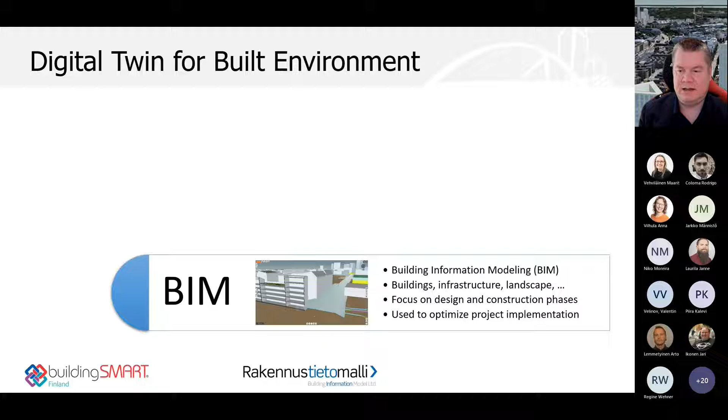There are also different levels where we can see the digital twin for the built environment. If we think about building information modeling, that is mostly at project level. So you have BIM models of the building, BIM models of the street, pipe networks, or anything that you are going to construct in a project. The focus is mostly in the design and construction phase, and the goal is to optimize that phase.

We have a city level where we are talking about city information modeling, where we have an information model of the existing city and also city planning and city development on top of that. So the focus is on future city development. And on top of that, we have asset information modeling level, where we have a database of all the assets, all the elements in the real world, and that can be used for optimizing the daily operation of the city, like how traffic is moving, how energy is used, how the environment is developing, and so on. So all of these levels combined make up the digital twin.

Here are some examples of digital twins. Digital twin of existing conditions is one part that you typically start from in the project. You have different kinds of city models. On the left, you can see the city model of Tampere, which is a photogrammetry model produced with aerial photography or drone photogrammetry. These kinds of models you can create with drones, for example.

On the right is an example of a city information model based on the CityGML standard, which has objects with attributes, and the model has a hierarchy. So that's a more intelligent model of the city. But you can import different kinds of survey data. Maybe the city model is updated once a year, but for the project you can use laser scanning and different survey methods to make much more accurate models of the existing situation.

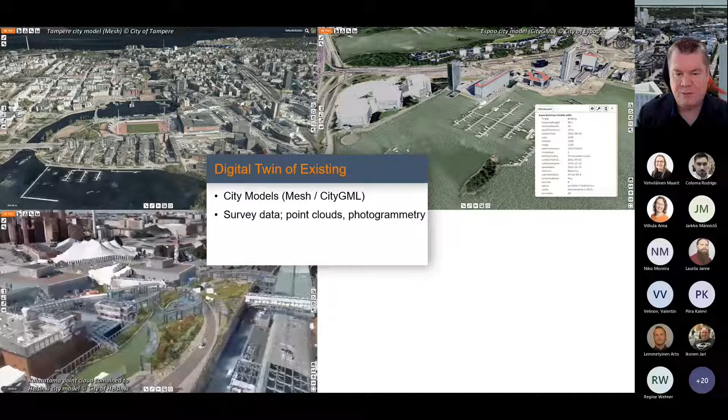For example, this point cloud has around 300 million points, and the point density is a couple of centimeters. So very, very accurate models. As you can see, all the vegetation and leaves and everything is modeled very accurately.

On top of that, we can add different kinds of GIS data. GIS data is geographical information that has geometry, attributes, and geolocation. So all of this data has geolocation, meaning any element here knows its location in the real world. So we can have different kinds of data like map data, area planning data, and traffic network data that can be combined with the city model.

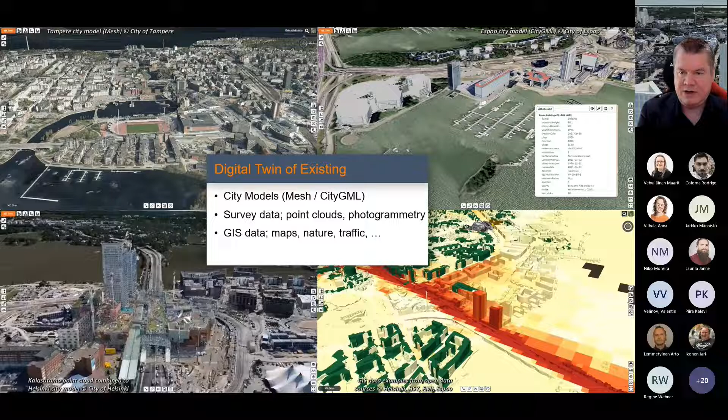There is a city model of Helsinki and Espoo combined together into this kind of regional model. We can have traffic pollution information; this is air quality information. All of this information comes from different sources. The air pollution data comes from the regional actor in the Helsinki region, and this comes from the Finnish Meteorological Institute. Then the City of Helsinki maintains data like protected bird areas, protected vegetation areas, and different kinds of protection areas, as well as information about existing areas like parks and roads.

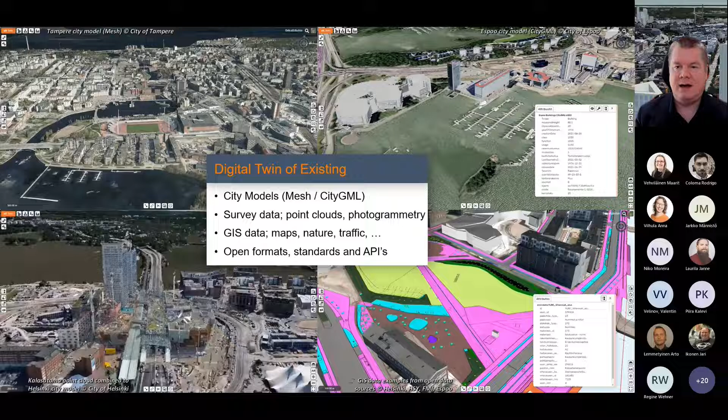And all of this information has a lot of attributes. So we have a huge amount of information about the existing environment, and all of this is combined using open format standards and APIs. So you don't import and convert data, you just link the data, like in an internet web network where you link web pages. In the same way, we are linking the data and combining it into the digital twin.

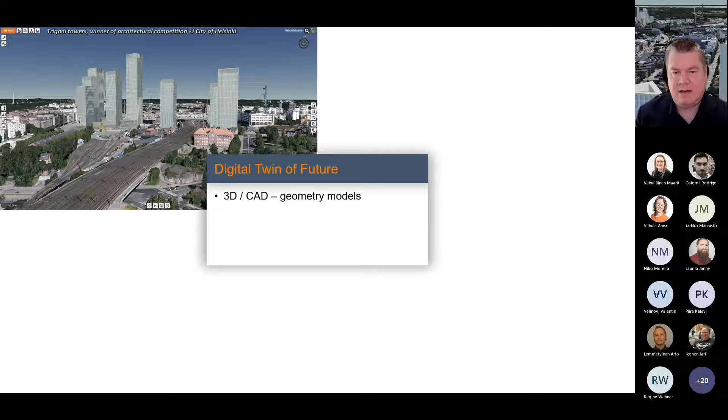And for the future, we can have different kinds of project data. We can have basic 3D CAD geometrical models; these models don't have much information, but when we are talking about BIM models, then you have much more information—manufacturer material information, volume information, and that kind of thing. We can have BIM for buildings and BIM for infrastructure.

Like you can see, we have all the electrical, ventilation, and everything for the buildings. Also for infrastructure, we have all the bridge structures, all the road surfaces, underground pipe networks, all the landscaping, and everything combined together.

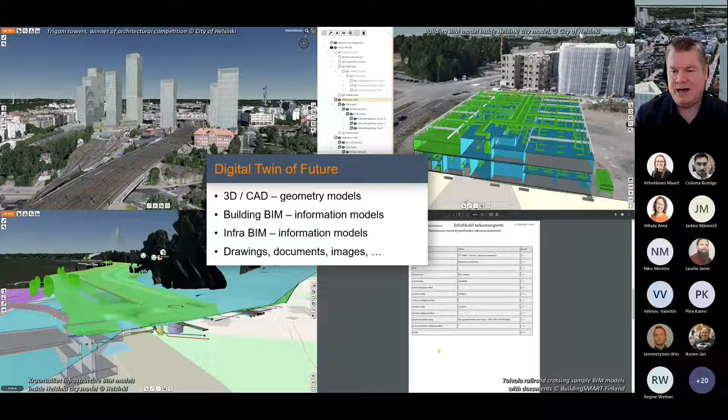These models are quite detailed models of the project. On top of that, we can also add different kinds of data that is not 3D model data, like documents, photos, and other kinds of data. Here are some examples of how you can use the digital twin.

Once you have the digital twin of existing and the digital twin of future combined together, that is a digital twin of existing in the future. You can then use basic tools for making this kind of digital twin, which are information management tools. You need to manage all of this information well. In a complex project like this area planning project, there is a lot of information in all of the life cycle phases and all of the different domains, and everything has to be combined into one physical model.

We can have different information visualization tools. Here is a road project where we visualize, for example, the alignment of the road. That is something that is not a physical element, so we also visualize non-physical elements. It can be other kinds of data also, so information visualization is important.

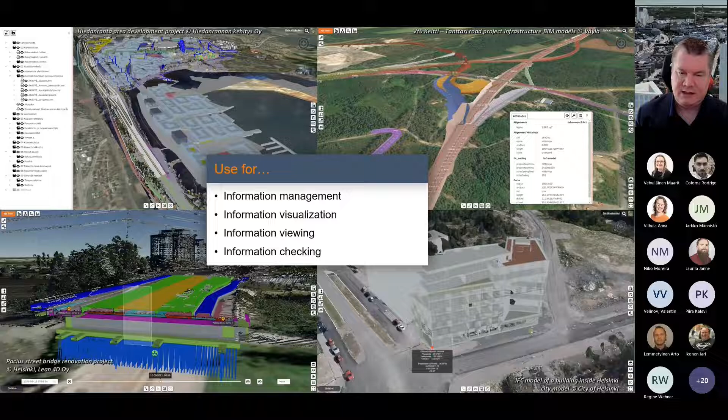Then, of course, there's the basic viewing of information, so you can view it in different ways. You can cut the models out and look inside them, turn elements on and off, and use many easy ways of viewing, as well as measuring from the data. This includes measuring coordinates, measuring distances, and other kinds of information checking tools.

More examples: once we have the digital twin of existing, it can be used easily for analyzing the future cityscape or visibility. For example, here in Helsinki they were planning these high-rise towers, and they are already building other towers, and there will be a new big bridge. So the cityscape of Helsinki will change a lot.

Having this kind of model, you can view it in any direction, any location, and see how the cityscape is developing. There's no limitation on how you can view the model at any place, and you have the whole city in one model.

Another way of viewing this is that we have area plan regulations and area plan maps. If you design a new building, you want to see that the building design fulfills the area plan regulation maps, so you overlay the building model on top of the area plan map and check that it is inside the regulation areas.

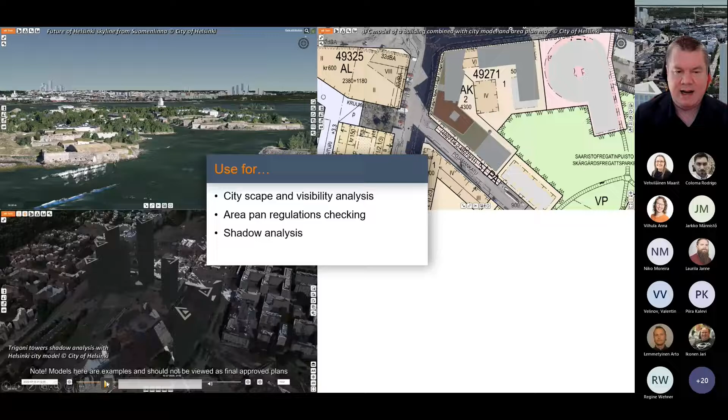Of course, when you have the city model and the design model, it's easy to analyze how the design or the project will affect the environment. This is one example of how shadowing can be analyzed, showing how the building will cast shadows at different times.

Also, one important aspect is that we need to manage the time perspective, since cities develop over time, and we need to do that also in the digital twin. So we have to have the fourth dimension, which is time, in the digital twin. This lets you simulate the construction process or city planning process - how does Tampere look after 10 or 20 years?

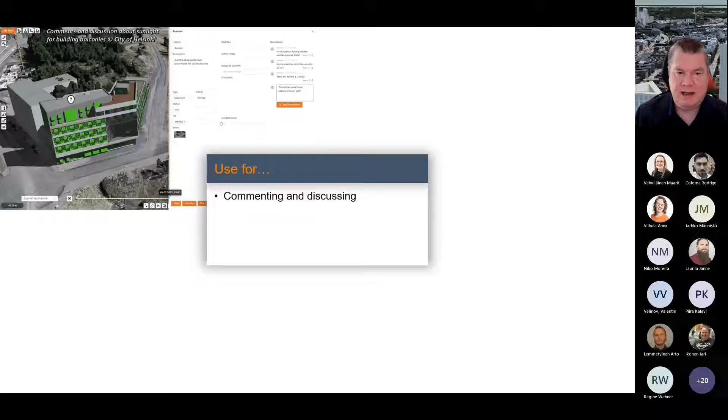You can use it for collaboration inside the project team, doing different kinds of commenting and discussion. You can also manage tasks inside the model and use it for quality management. Here is an example of the building permit process, where tasks go from one person to another through this kind of building permit approval process with checklists, ensuring that users complete certain tasks.

Also, for brainstorming and sketching, you can use different rapid modeling tools to make simple volumetric models of your ideas, so you can test different ideas. You can have a brainstorming meeting and get ideas for new planning and similar things, and everything can be done directly in the 3D city model.

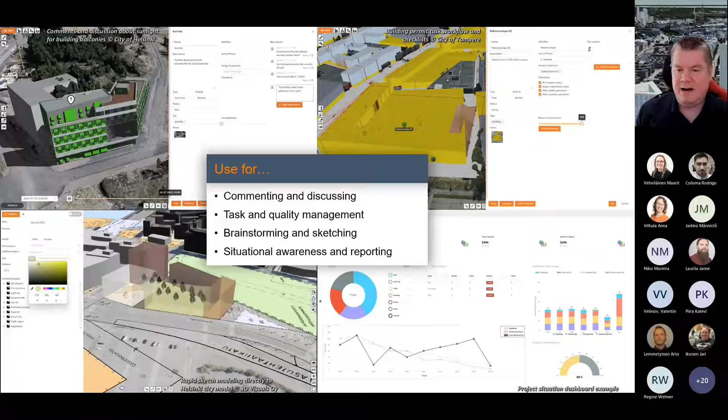Finally, when using all of these collaboration tools, you get real-time situation awareness and reporting of the project. This is what you can do internally in the project.

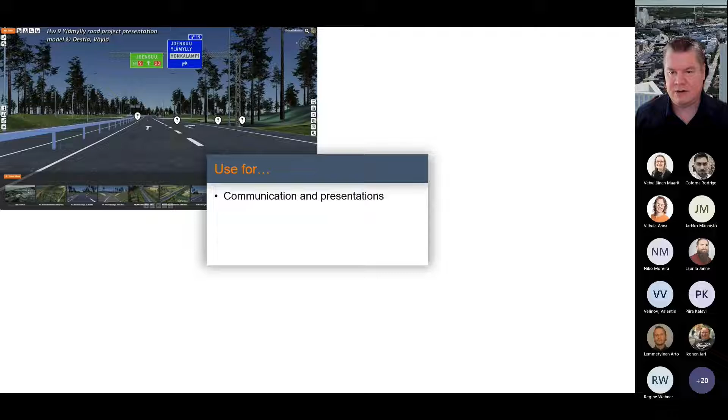You can use digital twins also externally to communicate the project to citizens, decision makers, and stakeholders. You can have different kinds of interactive presentations, publish these models online, and collect different kinds of feedback from citizens. You can present alternative designs and ask for feedback from local citizens about them. You can also integrate this into participation processes and participation platforms, so the 3D digital twin can also be connected to different kinds of interaction platforms.

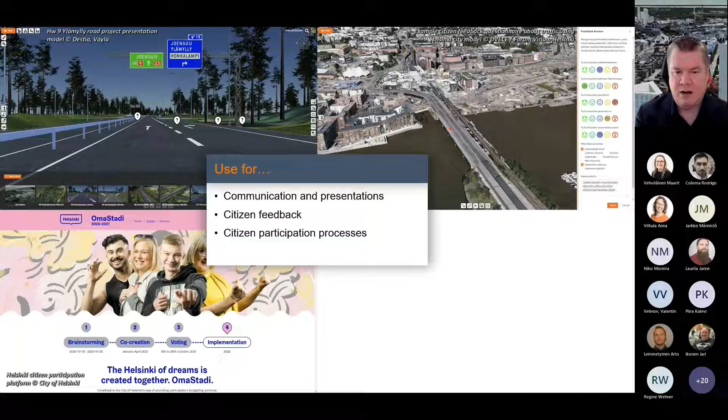And also on site, you can take the data with you and see everything around you using augmented reality.

There are some example use cases.

One use case for this kind of digital twin and building information modeling is design project coordination. You manage all the different design disciplines, maybe 10 or 20 different designers working together, and everything has to fit together and work together. This is the only good way you can combine everything together and optimize and check that there are no conflicts or errors.

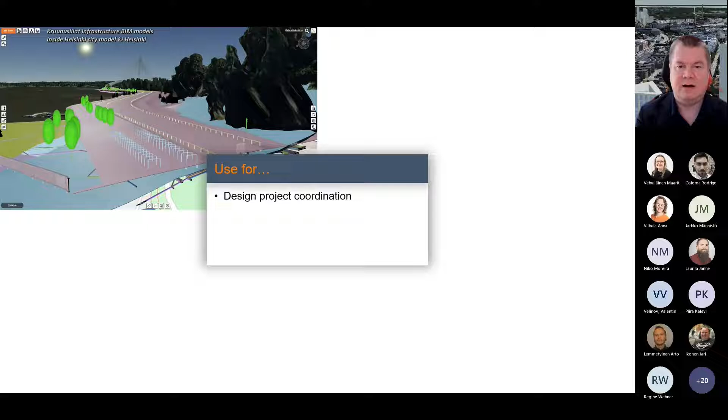Also, the building permit process, which I already talked about, you can use it for checking how the building fits to the existing environment, and also for getting feedback from neighbors, so the new building will not too much affect them, or the neighbors are happy with the new building.

You can also use it for area construction coordination. Like in this Hiedaranta project, there is construction going on - they are building a new tram line, there is architectural planning, design of new public parks, design for roads and streets, and also underground pipe networks, and area planning at the same time. This kind of coordination - this is a very good tool.

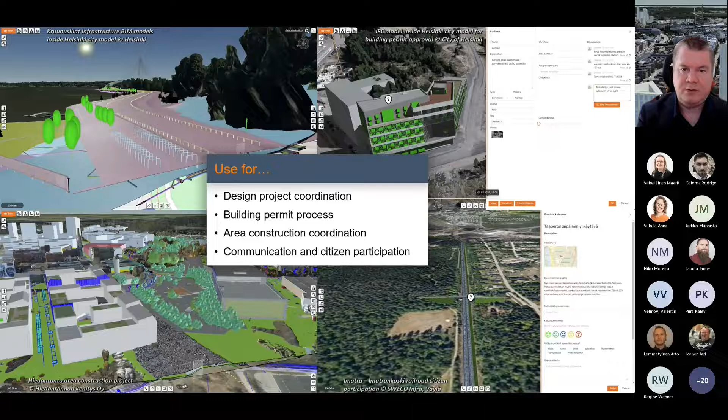And citizen participation and communication. This is a railroad project in Imatra where we publish this model to the audience, and the audience can give feedback for the project. Also use it for architecture and design competitions.

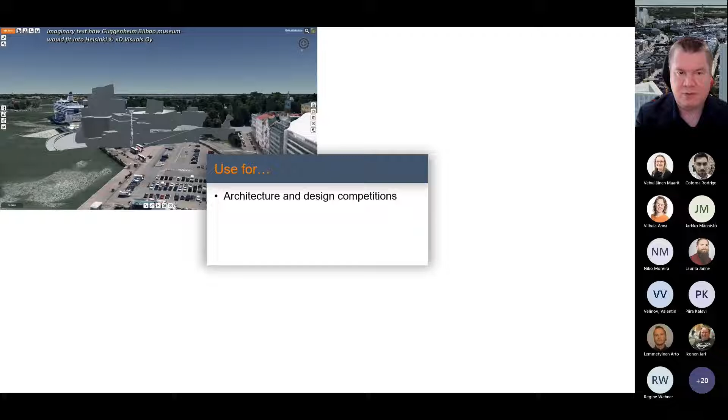This is not a real case - there is a real case discussion in Helsinki about what to do with this harbor area in southern Helsinki, in the middle of the city. I just made an imaginary test, took the Bilbao Guggenheim Museum and put it here, and it fits quite well. This can be used for comparing alternatives and seeing how different proposals fit to the city.

If we go into construction, we can also manage the construction site. Construction sites usually use BIM models. This is a bridge renovation project - there is a BIM model of the bridge, and they are renovating it, but we also have point cloud data around the construction site. Typically construction sites laser scan or take drone photogrammetry maybe every week, so they can compare what was actually built to what was designed.

You can also use this to plan the construction site arrangement - like here we are planning where the traffic is going when the bridge is constructed in different phases, and also where the construction site storage areas and parking areas for employees are. So a lot of things can be done for construction site management with the digital twin - basically it's a digital twin of the construction site.

One example for the maintenance and operations phase is that we can bring these BIM models into facility management and combine documents into the BIM models. This is an example of bringing the operation manual of kitchen equipment into the 3D model. It's easy to find because the documents are geolocated - you just click on the place of the object and you get the document open.

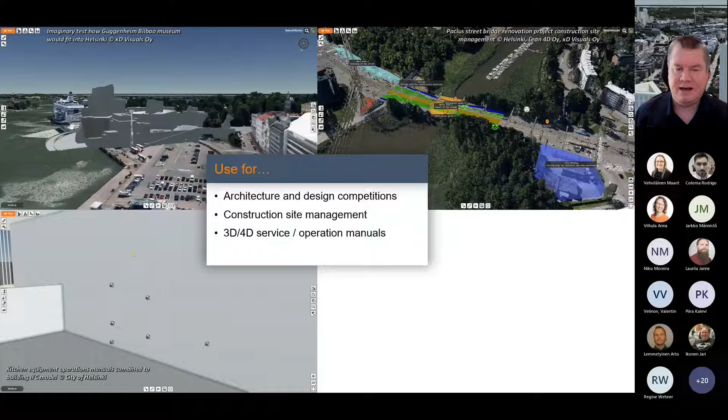This is important if you are using augmented reality - then you get documents in the augmented reality view as well. So when you are on site, you can open your mobile phone and see all the documents around you. It doesn't need to be 3D data - it can be 2D data, it can be document data, and this way you manage different kinds of information.

You can also use it for education and entertainment. This was a fast example of how we combined the Helsinki city model with GIS data of World War I fortifications, which can be used with GPS positioning. You can walk here on site and use this application with augmented reality or a GPS map view to see what used to be here - like a historical field trip you can do with your children, a family trip during the weekend, for example.

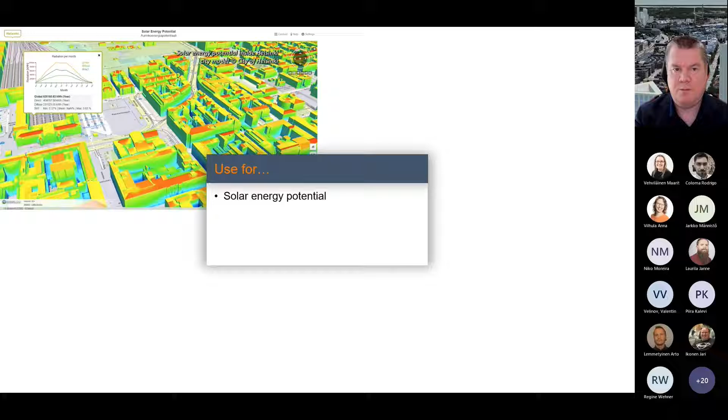These are examples from Helsinki for energy. Helsinki is very good, they have done solar energy calculation, how much solar energy can be produced in Helsinki. They also calculated CO2 emission of the buildings and also what kind of climate change will be affecting these buildings.

Also the geothermal or geoenergy potential in Helsinki, where you can build these geothermal plants, and also information for each building in the city, what is the energy type they are using and how much energy they are using. So a lot of data about energy use, and of course the goal here is to be CO2 neutral at some point. And finally, all of this data is georeferenced.

So in reality, we already have a lot of data around us, we just don't see it. So there are two ways to see it. We can use virtual reality to go inside the data and view it from inside and look around virtually. This you can do in your office, or you can take mobile phones and go on site, and then you can see the data around you.

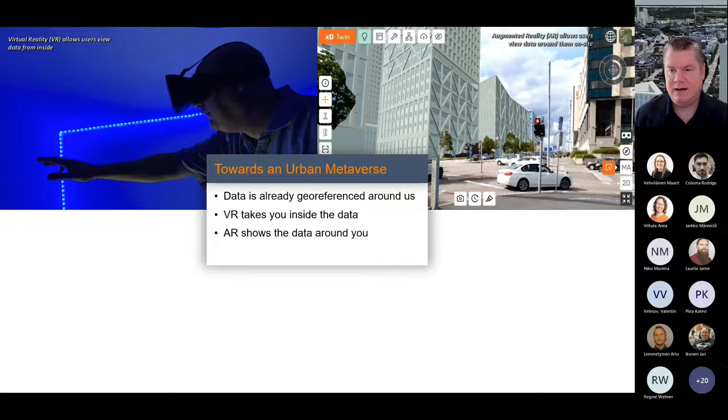And the data can be 3D models, BIM models, 2D data, it can be even document data, it can be statistical data, it can be all kinds of data that you can use on site. Just open the mobile phone, and the mobile phone is the window to the data, and then you can easily open documents around you and so on.

And one advancement here is game engines, that game engines allow nowadays to bring this digital twin data into the game engine. And game engines, they have a lot of tools for different kinds of gamification. They have good tools for visualization and interactive applications.

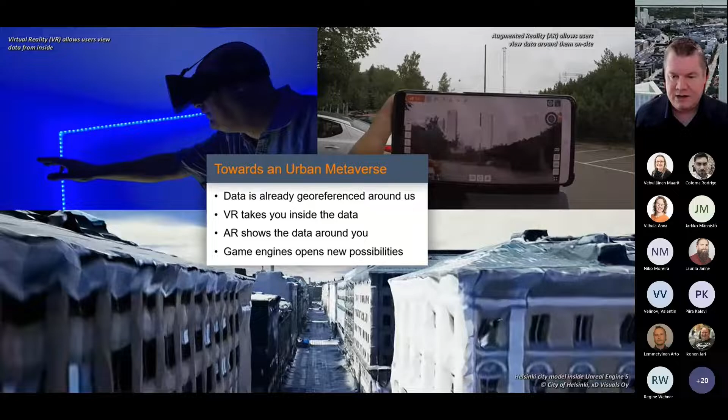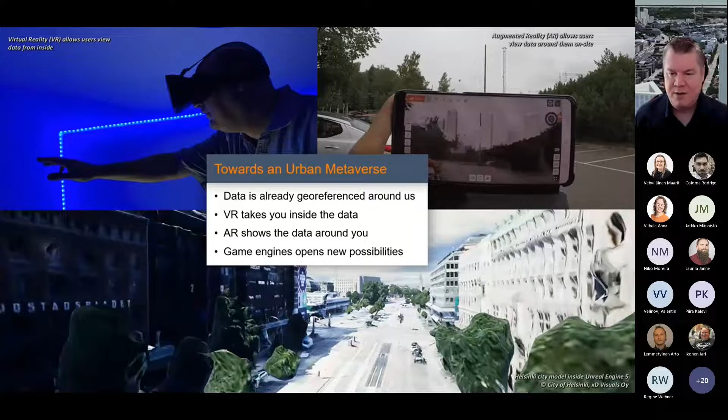And one of the key elements maybe for digital twins is if you open up your data and give it to the audience as open data, that makes the audience, businesses and even hobbyists take the game engines and develop different kinds of applications on top of that. So combining digital twins and game engines, I think it's one of the future trends that makes possible different kinds of innovation and innovative applications.

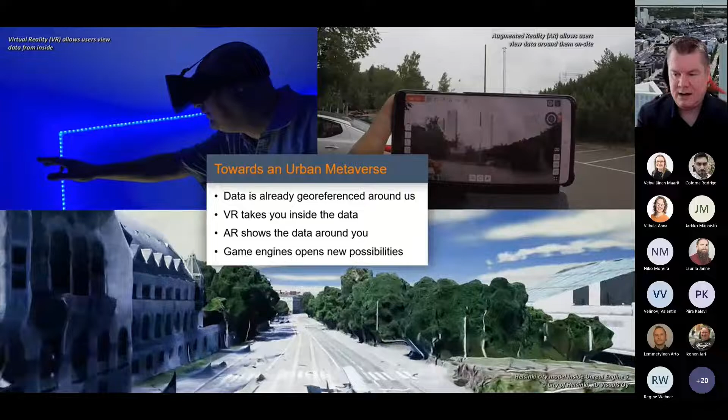This is the Helsinki city model inside Unreal Engine 5. This is very brand new, and I think this is one of the first city models in Unreal Engine 5.

And that was my presentation. Of course, there are a lot of other possibilities for digital twins, and I hope this gives you some ideas, and I hope the next presentations will give you more ideas. I think we have a couple of minutes for questions too.

Yes, thank you, Jarkko. There is actually a question. Regine Wehner is asking: have you evaluated how much citizen participation has increased since using digital twins for the public?

Citizen participation using 3D models is quite new. Most citizen participation platforms are traditional 2D platforms that show pictures and images, but those are very active, especially in the city of Helsinki. In the middle of the city there was an architectural competition and proposal for new buildings, and it got around 6,000 answers and comments. So people are very active, and bringing this 3D digital twin information will increase the available information to these people. We are now piloting and testing this in the city of Helsinki, and this 3D option is optional alongside the other methods already in use. But I think this will increase, the more we use it.

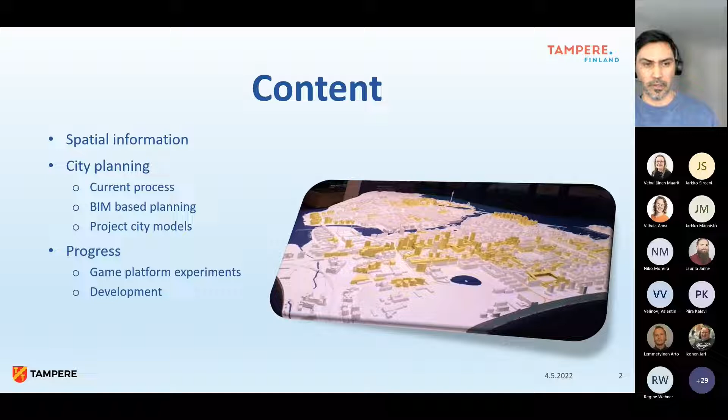So yes, we give away this 3D data of buildings, terrains, and the city environment, how it looks now, and we also have GIS data and borders where we give information about buildings, environments, land use, traffic, and quite a lot of other information.

So a wider range of types of data, also download portals where you can download this kind of file information. We also have interfaces that you can connect to, and we've been doing that for a long time, with a few experiences of using those interfaces also in models.

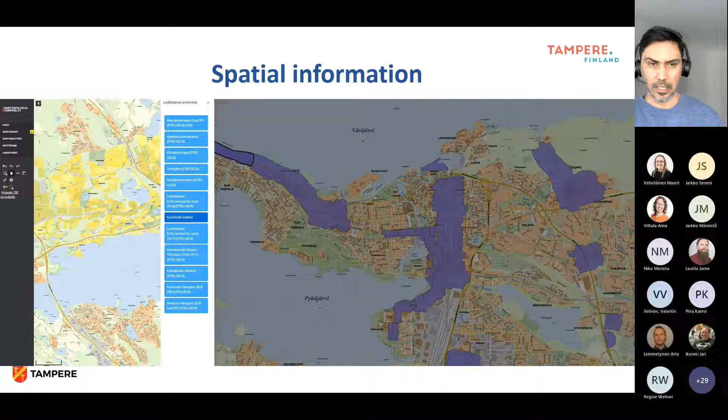But first, I have tried to make this concept very easy to understand, because if I can understand it, I know you are going to understand it too. If we think about all this data, which Jarkko also showed in the earlier presentation, we can name it infrastructure asset management.

We can understand that it's coming from different databases, and it's BIM, or SIM, or IM type of information, and it's GIS and CAD information. It's information from traffic, from land use, and from every area of city planning, and national level information about buildings and so on.

So if we see that we can manage this kind of digital data of infrastructure assets, it will be much easier to create a digital twin. They are very close to each other.

So if we can see this concept, we can dive into the next slide to see what are the challenges of this information management and flow toward digital twins.

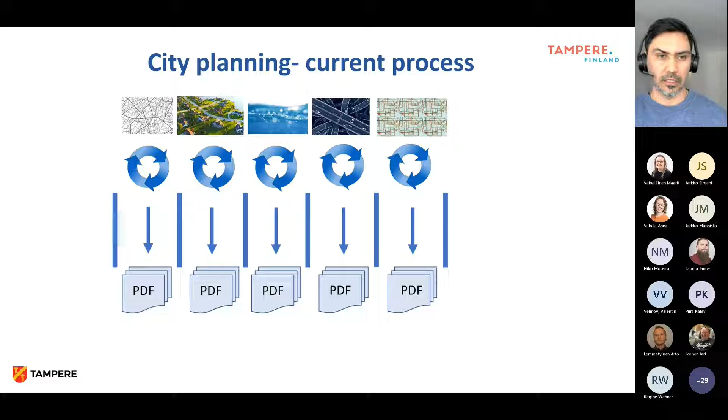So imagine, if these are the production lines, when we need the information to flow into a database, into infrastructure asset management, all this information—it's very difficult.

But we can see the change occurring, coming bit by bit. The digital twins currently made are mostly like a snapshot, because they are not connected straight to the source of the information. So they are like a digital twin, but a static digital twin.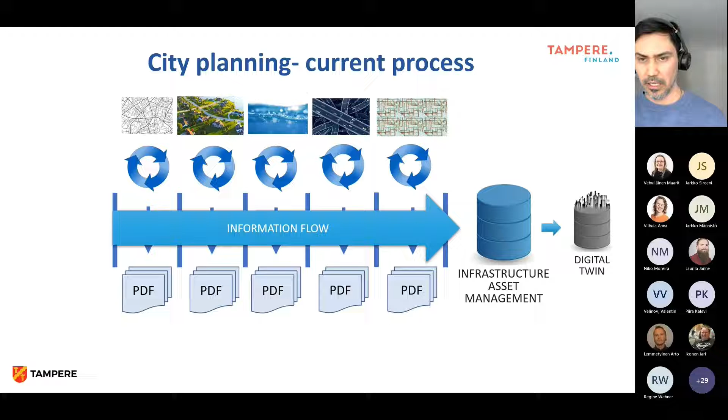So what we want is to make this information flow to databases, so the digital twin can be as close as possible to the infrastructure asset management database.

One of the challenges and improvements we are seeing is that the requirements for acquiring, ordering and buying information and planning are changing. We have better tools to order data and order planning that we can use in many ways. It's not only PDF files, but the information behind those files. We can see the tools are developing, and the knowledge of this is spreading to every place in the city.

One thing close to my job in the projects is data management. We have a project data management plan that tells us which requirements we are going to use to order planning and order data, and we have to have a project data bank where all the data is going. We have project city models that show how the planning is going on. It's a very analog or mechanic type of data management, but it has to be done so the information flows through the whole cycle of the project.

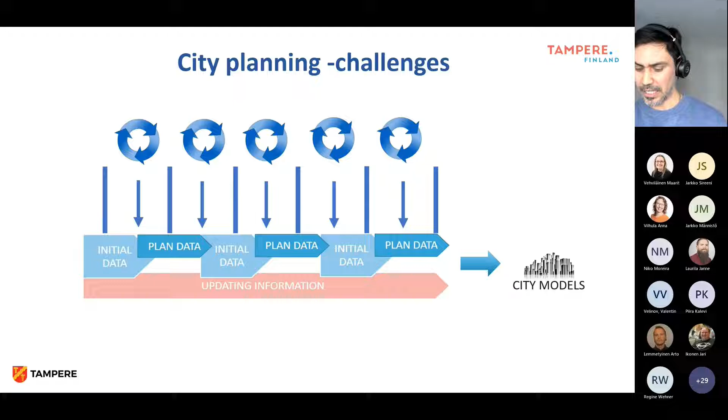Digital twins are more like being able to ask the city models things and get straight answers from that. The project city models cover a wide range, depending on the phase or stage of the planning.

We have seen that when we try to drag this information into this visual type of city model, it's always a little bit late compared to the actual planning. The planning goes much faster in its own databases and companies' own programs and computers than the city model, which comes a little bit late, but it's improving all the time.

This data management concept is coming more and more into the projects.

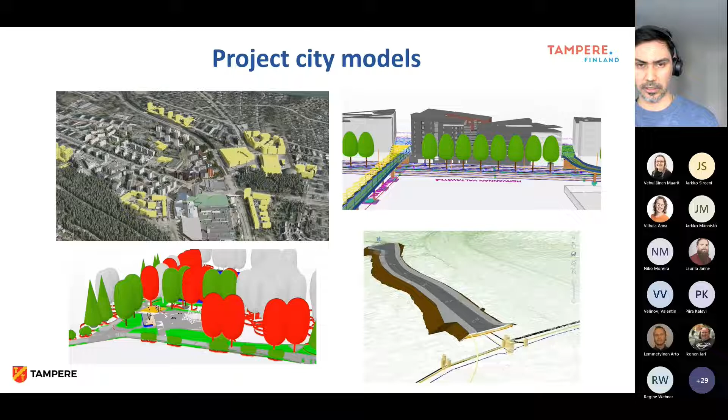So what we have done, when we gather all the data, is use this 3D cave here in Tampere, and we made a city center like this, a basic level digital twin. We have been there with citizens, decision makers and planners, and we have had planning competitions.

We can see these different kinds of solutions or propositions there, and the judges can see not only PDF files but be surrounded by, or inside, the competition ideas. This has been a huge advance in using these models in the planning process.

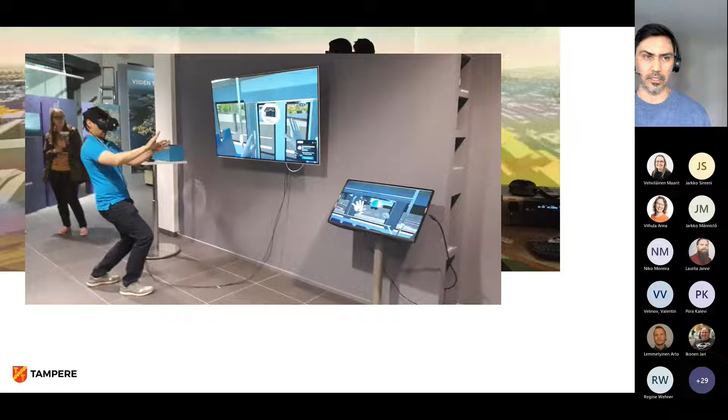Here is a picture of one game platform we used before the tram was made. We asked people to jump on the tram and experience how it's going to be in the city center, going with the tram, and asked them which color they wanted the tram to be. We used virtual reality for that.

Then we made games for planning with citizens, asking what kind of park they would like to have in the city center.

This is a picture of a digital twin of Hervanta that we're going to see a presentation of a little later. This is the newest project that we have, very interesting.

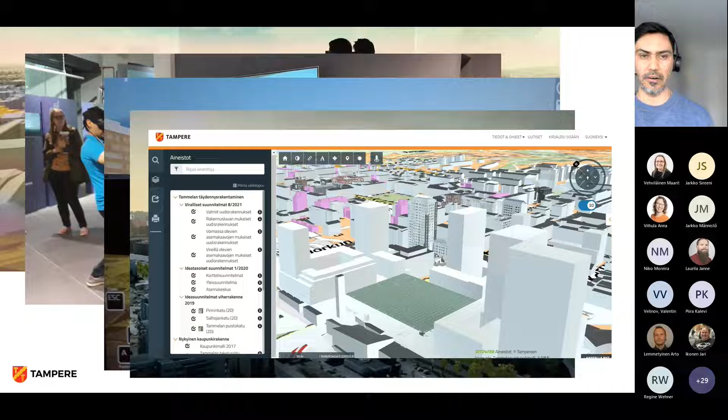We also have our own company tools where we put the data, and we can manage these project models there in the project.

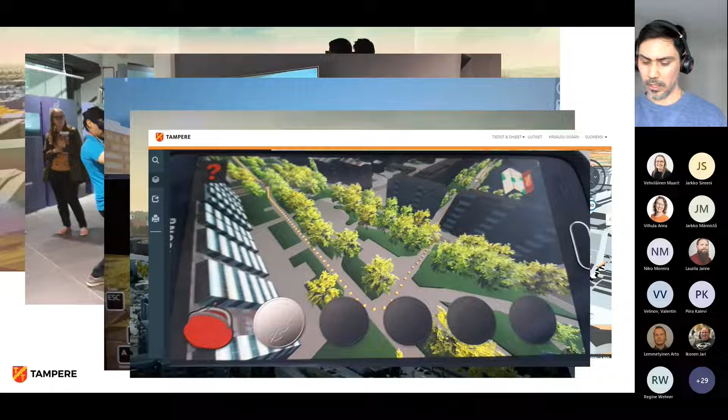We have also done an application for phones where we ask citizens what kind of investment they would like the city to make in their home area, and also a little bit of augmented reality in Hiedenranta, with different tools.

So a little bit about how we see the future is going to unfold. We hope that in different areas of city planning, the production line, we can see that the laws are changing slowly. The final product is maybe not a map anymore.

It's going to be more intelligent information, like in general area planning. We can see in Tampere they plan this information that goes to a database, and maybe in the near future it's going to be the same in local area planning. We hope that the planning of these different infrastructural areas is going to align so that information flow can occur.

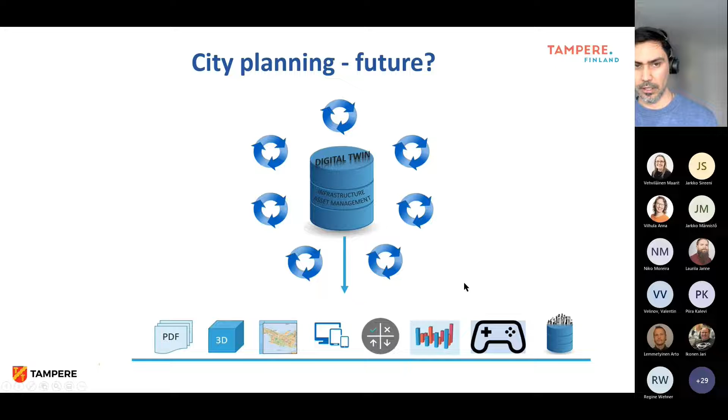Thank you, Rodrigo. I don't see questions online, but I could ask one. As we have made collaboration between now Stardust and also your organization, how do you see the project in the future could help toward this future target of yours or your future vision, and the collaboration? What could an EU project, for example, do to help?

Well, that's a good question. It comes to my mind that these experiments we have done require companies' own tools and knowledge, which are so much more advanced than ours, and the final product usually ends up outside of the tools the city has.

So I wonder if in the future we could make experiments or projects that develop our own tools, like open source based solutions and tools, so that the work does not leave the house but stays on these platforms that are open source.

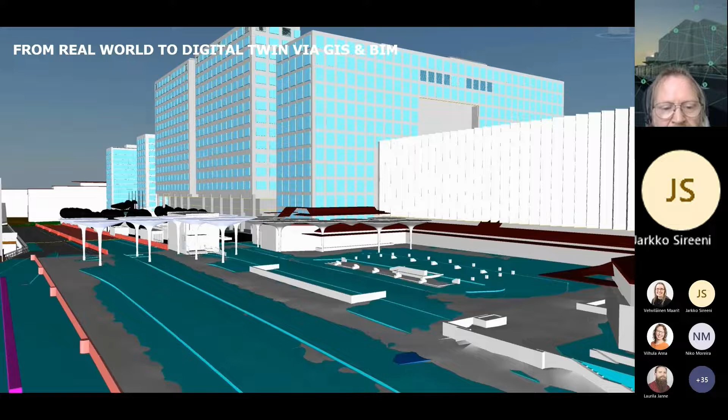Our environment is also more like a 360 view. This video helps us understand what happens in our built environment, where we live, and how digital services and solutions will change our behavior.

Availability of data defines the context of the digital twin in the digital world. We can also find more dimensions than our 3D real world gives, like present time, safety and security, economical, ecological, or even cultural sustainability. So our digital twin and digital environment gives us more dimensions than the real world.

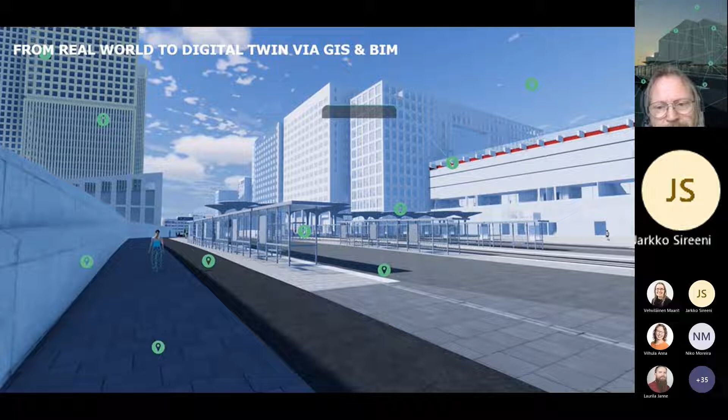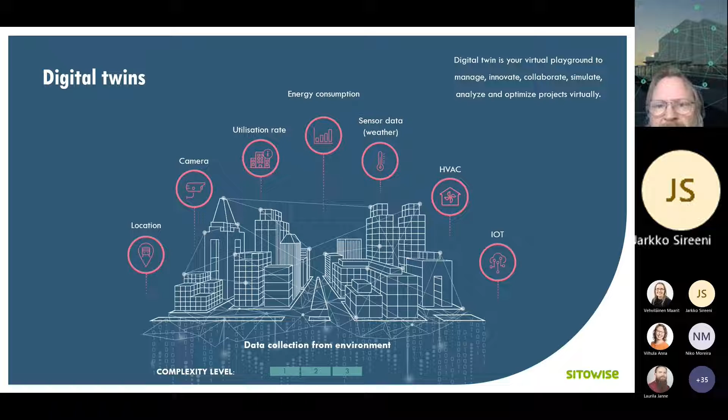And also, the digital twin is collaborative, smart, and alive because it's based on game technology. I won't go any deeper into digital twins because Jarkko already told what it is, but it's a virtual playground to manage, innovate, collaborate, simulate, analyze, and optimize projects virtually.

One of the key things is the 3D environment and how we process and manage it. We have source data, an information management system, we publish it, and also create a 3D environment. And what's really important is that we can put that data back into our information management system, or even create new source data based on 3D environments.

Communication, collaboration, and interaction. Those are the key words for understanding what happens in our smart cities, and how and why we are creating visual digital twins.

Our 3D environment is developing from a static environment to a dynamic environment. We can use 3D city environment as a planning and design platform. We can use it for simulations, and most importantly, we can publish real-time data and also make analysis and forecasting.

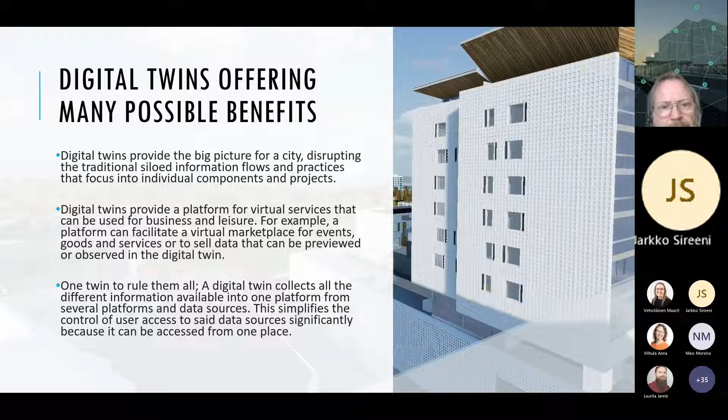Digital twins offer many possible benefits, like providing a big picture for the city, disrupting the traditional siloed information flows and practices that focus on individual components and projects.

Because we have a great demo after these slides, I won't go any deeper here, but Niko will show in a live demo how we can help urban development use 3D data, how we can create understandable language and communication between different stakeholders, etc.

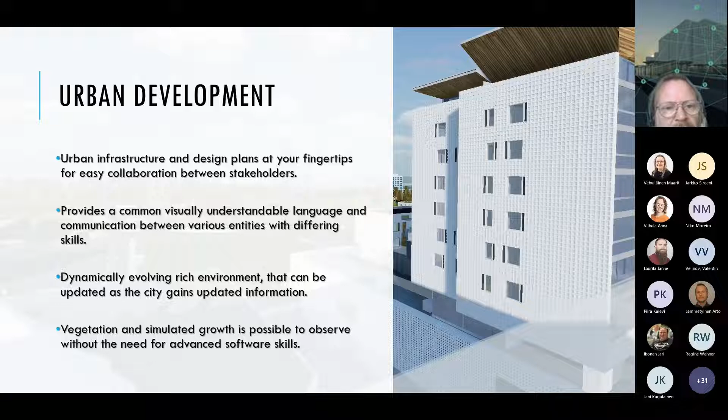Digital twins also help smart cities. We can simulate 5G networks. We can create connections to IoT, or simulate autonomous public transportation, smart lights, air quality, or whatever we want to show.

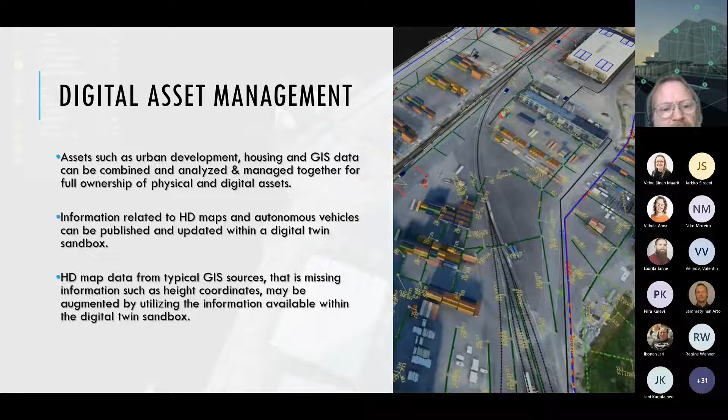Digital asset management is also really important, and I think Niko's presentation will open that up more. And we have different scales in digital twins.

We can discuss city-scale things, but we can also go deeper, like into buildings and inside buildings. We can publish HVAC machine data and use that like maintenance systems.

But that was shortly, in general, what we are thinking about digital twins, and now let's go with Niko to a real demo of the Hervanta area.

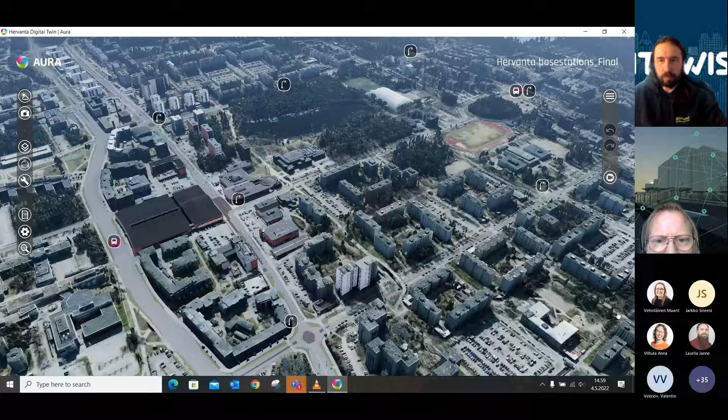Yeah, sure. Thanks, Jarkko. Hopefully my screen is visible. So if it is visible... Yes, it should be visible now, in Hervanta.

So here we have basically everything coming together, what both Jarkkos have been saying and what Rodrigo said about the initial data that cities provide and collect. And all of this is basically now built from that kind of initial data.

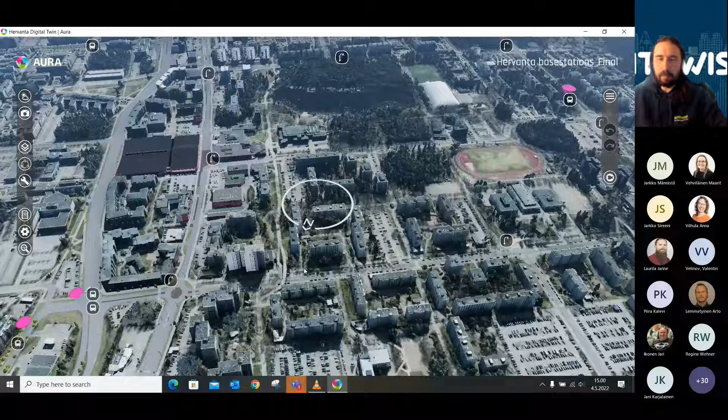From our perspective, the idea was to test the gamification aspects and simulation aspects of the possibilities of a digital twin in Hervanta, where we have an autonomous vehicle testing site that is feeding traffic into the public transportation system. These tests were being conducted in the area, and therefore we created a digital twin for the area.

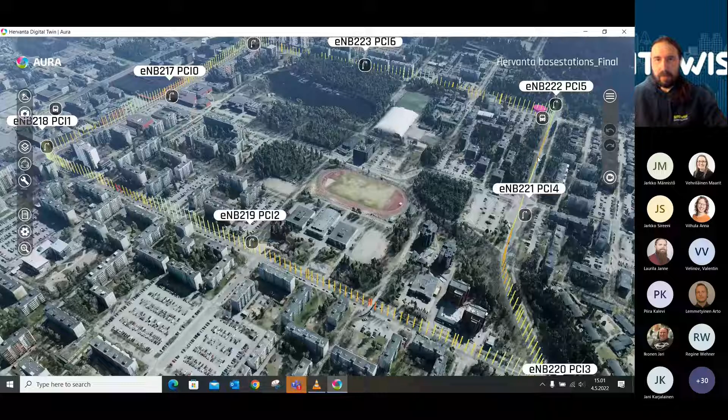The testing area can be made visible by choosing the base station's measurement for the wireless network in the test area. These are measurements by VTT from that test site.

We can basically visualize it here, but then we can also bring in the simulation aspects. The idea here was to utilize this kind of game engine in a way that allows us to also give access to third parties to this data so that they could build their own sandboxed experiments.

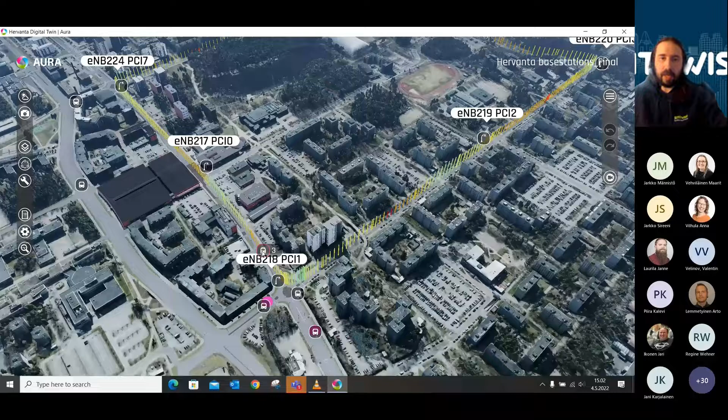Perhaps autonomous vehicle testing could be conducted here using this kind of source data, or this kind of digital twin sandbox data, and they could simulate different algorithms and test them out in real-time applications here, because here we have dynamic real-time transportation, public transportation. We have trams and buses driving here, sending real-time data into the game engine.

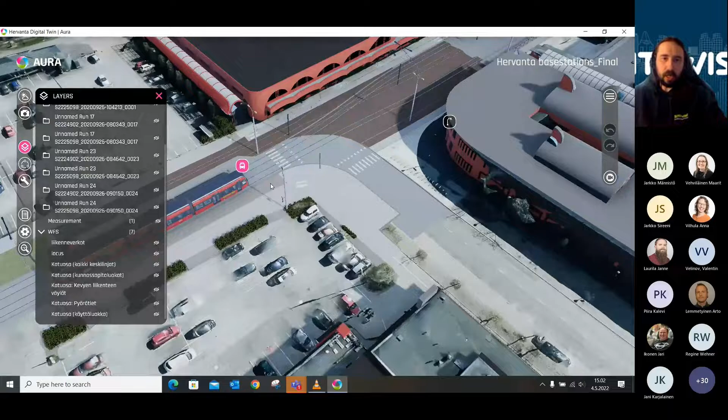And when we zoom in, we can see it better. So we have the tram driving there. I will disable the layer so you can see it better. So we have the public transportation ongoing here, buses driving, and so on and so forth.

We can click them and get the information, the line number, the bearing, the position of them, and so on and so forth. And basically, game engines allow this kind of interesting real-time simulation environment to be rapidly tested and produced.

Here we can see a bus is coming to a bus stop, and the pink dot you see in front of the bus represents the data point that is coming through the API delivering the data for the bus. So then the bus is chasing this location point in 3D space.

And this GPS data that is coming through is not in 3D geolocation. It is just basically two-dimensional map data. So what we are doing here is augmenting, using the game engine, this data by supplying it with 3D coordinate data using this city model as a basis.

Then we can also engage into simulation aspects for the 5G network that is here. We have the 5G base stations here, and we can calculate and simulate the radio wave propagation and how this vegetation, public transportation, buildings will affect the signal. We can literally manipulate the base stations in the 3D environment and recalculate the effect, the propagation of the radio wave.

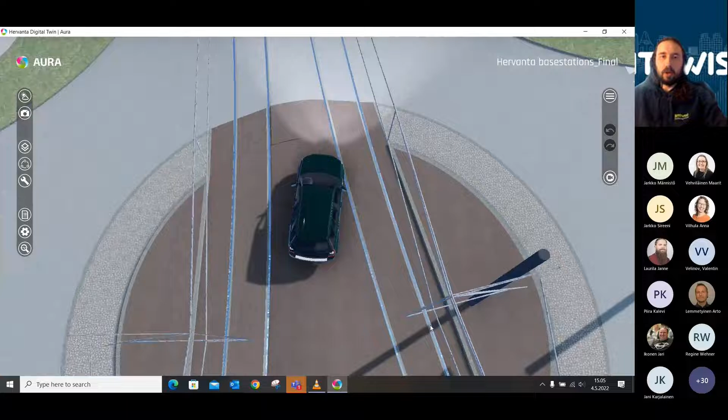What we can also do is pick a vehicle and go on site. I'm experiencing a little bit of network traffic here, my internet seems quite sluggish at the moment, so this image may be coming with a slight delay. I apologize if you have that kind of experience on your end, but I'm trying to display how we can basically drive with a simulated vehicle here, and this could be also the vehicle of the testing being conducted. I'm basically breaking the traffic rules here, but this gives a really good impression of what kind of people work here at Sitowise.

What I can do is simulate the driving here in this environment, and this could be connected to an algorithm that is operating the simulated vehicle, which could then be used as a basis for testing for autonomous vehicle traffic. Then what we also tried, what was new, was this HD map data from city provided sources.

So we connected the game engine to retrieve from a WFS service that the city has some data that can be used for HD map production. So what we're doing is recreating that same data here in a game engine, and again we are augmenting it by using the 3D geometry available for us here. So if you have 2D GIS data, it receives the height information as well as a result of the augmentation.

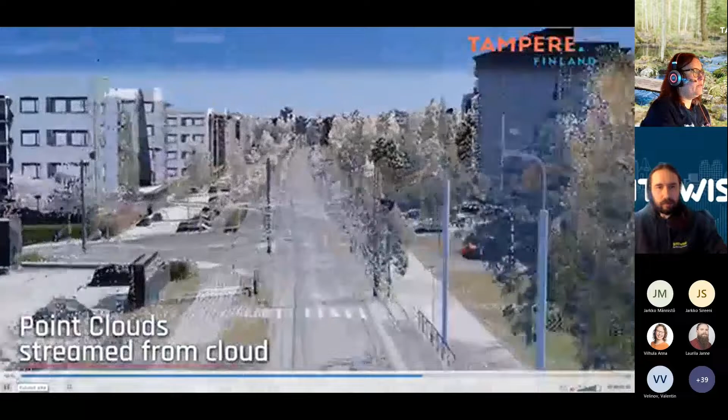I don't see any questions from the chat, but thank you for the presentation. I have one question: how do you see that, what should be the next steps for the cities, as you have been working with several cities here in Finland and maybe also abroad, in order to make the digitalization work progress? So what should we do next, or where should we concentrate in the cities? How do you see it?

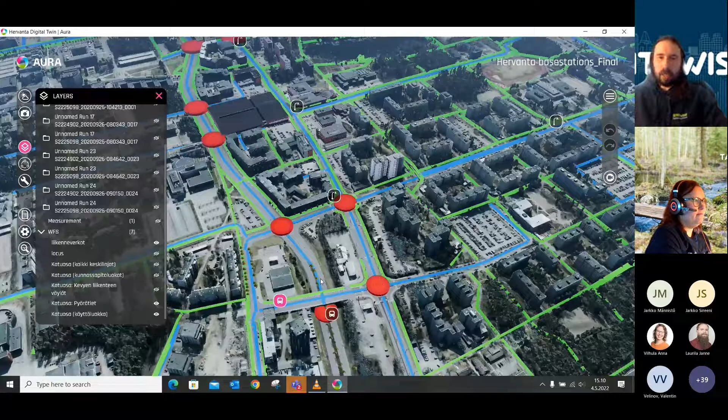Well, I see it that we need projects like Stardust that basically foster an environment of experimentation and collaboration between the cities and stakeholders, because most of these things that we do are still at a proof of concept level, and they would be ready to be used for construction projects and for the kinds of reasons that have already been outlined during this interesting webinar.

But the reality is that these need to become familiar and mainstream technologies, and that cannot occur before we have enough of this kind of organic collaborative network between business, cities and stakeholders together, so we can spread the information out there by showing what we can do, what we have done, what we have learned, and keeping it open. A lack of information or lack of experience is usually the main thing stopping this kind of project from becoming mainstream and basically the norm. So therefore, cities are struggling to capitalize on the benefits of using this kind of technology in their processes.

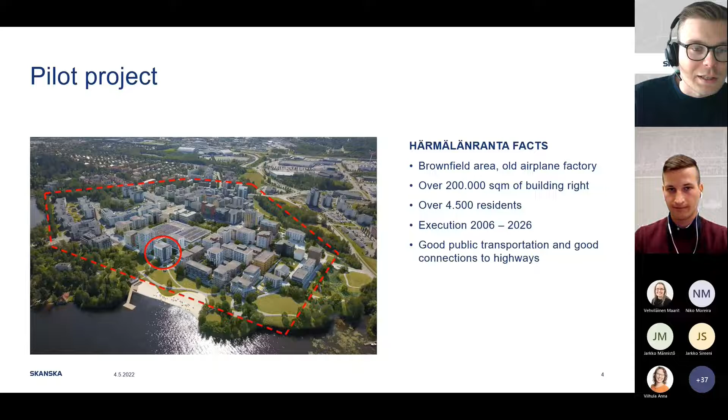Maybe the next slide. Yep. Here's some more information about the project itself. Härmälärannan Sampo has 7 floors, 40 apartments, and a guest room that offers extra space for residents' guests. The building was completed a bit over a year ago. The heating is produced by district heating, which is quite a traditional way here in Finland.

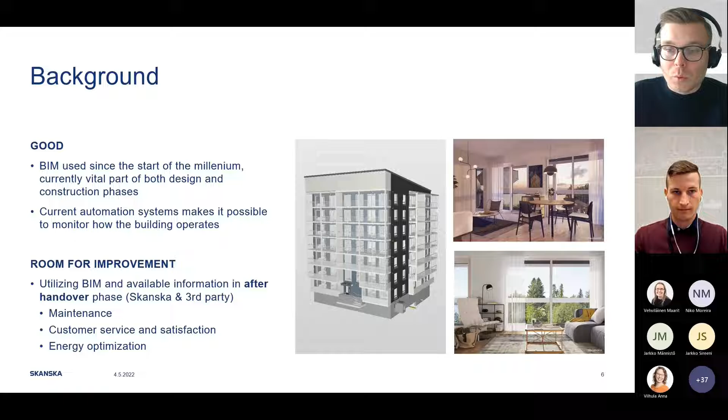There's also room for improvement to utilize these features after the handover phase more efficiently, for example in maintenance, customer service, and energy optimization. We see digital twin as one good tool for this and started to study them more with this pilot project. Next, Valentin will tell you more about the goals and scope and maybe give a small demonstration of our digital twin.

Yes, thank you, Niklas. Digital twins, we have been working with them for years now, but most of our use cases are based on commercial property needs. So residential buildings, let's say they're a new frontier for us.

This is why one of our goals was to get a deeper understanding of the indoor air quality circumstances in apartments. We know we can get the data out, but it's usually a point solution. In order to understand these really drastic phenomena, we actually have to smartly visualize the data. So visualization was a key part of our pilot project and how to get the understanding.

But also once the data is gathered and we can understand the phenomena, of course we want to optimize the systems. So a smart apartment from our standpoint means the indoor air conditions are as stable as possible. But a lot of things happen in the sophisticated and very complex systems behind the product. So how can we, by getting a grasp of how the building is working, optimize the back-end system of the building?

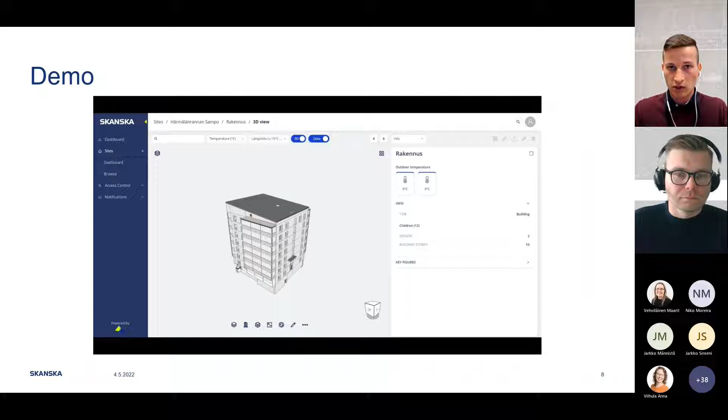But of course, as it's a digital twin, we have a 3D view of it as well. So here we have brought the IFC model, which is basically the architectural model, and utilized the spaces from them and linked the data to the apartments or the rooms themselves. We're utilizing only the architectural model, but this supports basically any IFC type.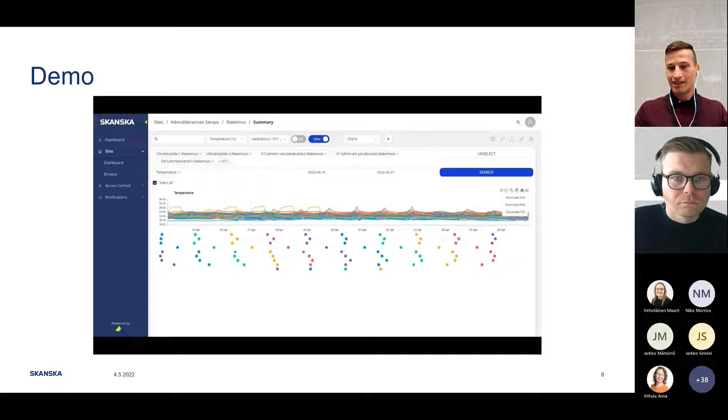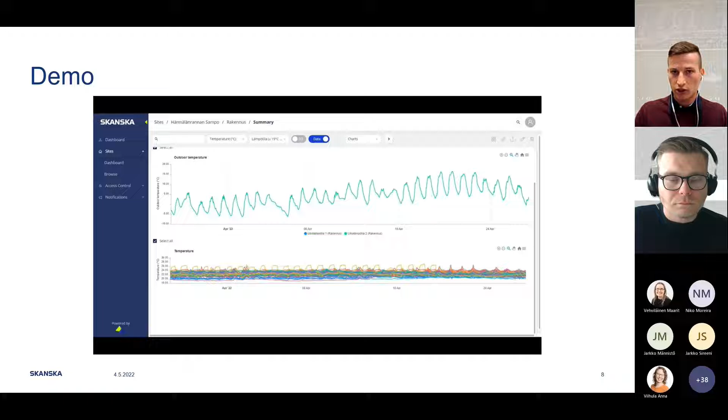But looking at the apartment level isn't enough, so of course we can compound the data into evaluating all the apartments at once. Here's an example where on top we have the outdoor temperature for this period of time and how the temperature reacted in the apartments themselves. What we're looking for is that there's no big spikes, so it stays as steady as possible. And we can define ourselves what kind of rules and visualizations we want to alter.

Niklas, would you want to give us an insight of how the stakeholders were involved in this process and what kind of findings we've had?

Yes. Maybe as mentioned a little bit before, Skanska is not the main stakeholder in a way for the digital twin or the main user for it, but the housing company itself might be the one getting the most advantage out of it. So we interviewed a few of the key stakeholders regarding the operations of the building and upkeeping of the building.

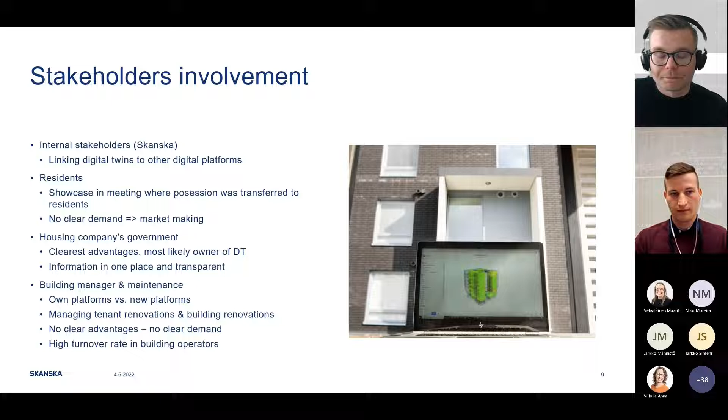And I think it's time for final words. Maybe Valentin, you could give us some of your thoughts on the potential of digital twins.

Just to sum up, I'm looking at the clock, we're running out of time. So if we look at the bigger picture, digital handover is a term that's a hot potato currently in the field, and as a contractor we're really interested in this concept. I see a close linkage to digital twins, because the basic idea is that all the basic information we gather from the development stage to the handover phase, we can submit to the client in a smarter way. Not just dump the materials on him, but consolidate it into some kind of service. Additional materials can include different documentation, 360 pictures, or maintenance service manuals and warranty documents, linked to the materials and products.

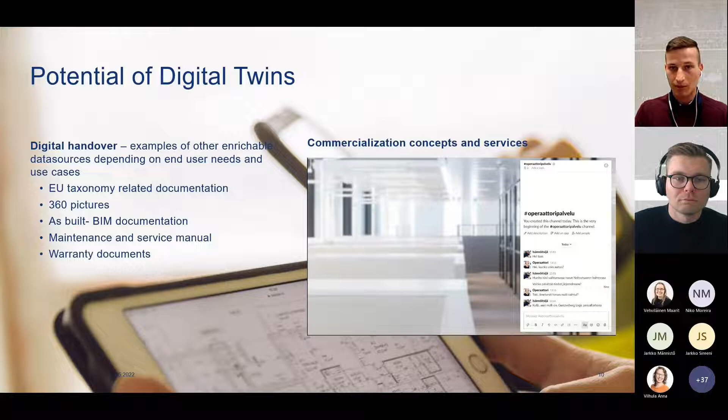And of course, commercialization. A digital twin is valuable when it's upkept, but a platform in itself doesn't solve it. We need different kinds of services and service providers who can actually make a business out of it. Here's a concept we've actually been developing with a partner. The end service may look like a chatbot, offering upkeep of the BIM as a service to the client. So if there's a change in the building, the operator service is responsible for upkeeping the digital twin. On a bigger level, we can think of a digital twin as a ledger—even though the stakeholders around the building premises change, the ledger always stays intact.

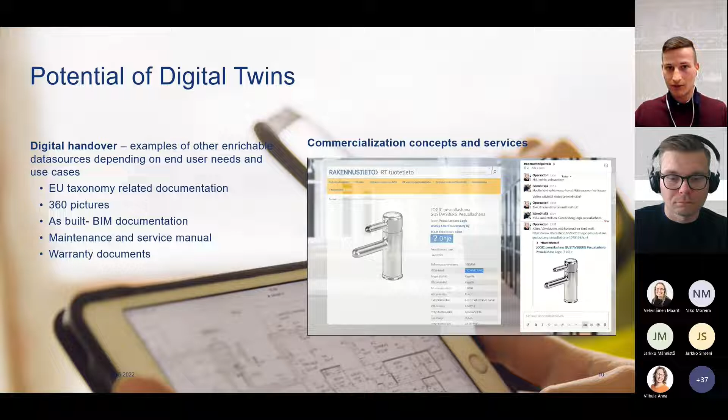Thank you. Ulrika is asking: is it possible to adapt, for example, ventilation and temperature in different parts or rooms of the building depending on how many people are or will be in those different parts or rooms? I think I can answer this one.

Yes, it is possible, and by using, for example, CO2 sensors, the system can analyze how many people are in the room based on changes in the exhaust air, and it can be optimized to lower the temperature and increase the ventilation. The problem is that if we make too many things automated, it may cause issues. For example, if CO2 starts to increase and we increase ventilation as well, the air may flow too fast, which can make the indoor climate not feel so good—it might feel a bit windy or cold.

So the way we solved this problem in this building is that there's one button on the wall panel that increases the ventilation system and lowers the temperature a bit. I think it was called some kind of party mode—when you're having more people over, you press the button and it runs for about 3 or 4 hours, then goes back to normal.

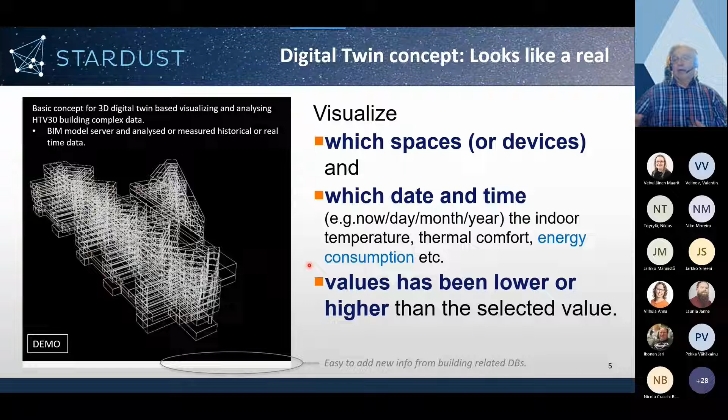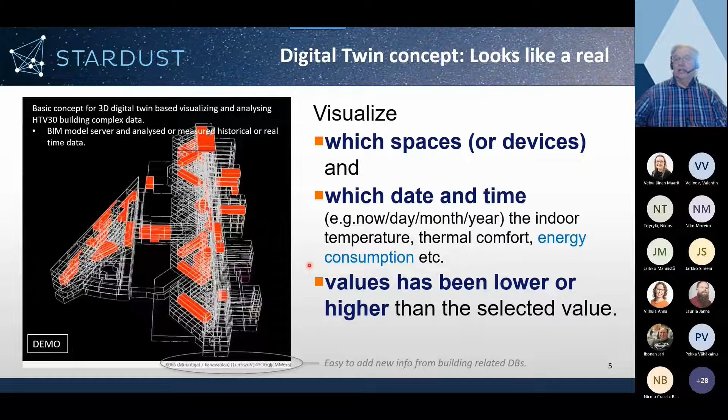The basic idea is that we can study using this model at which time some value has been above or under some limit values, or where conditions are good and so on. It makes it possible for us to study many different kinds of issues. So those values which we have to study, we can use meter related information, sensor level information to connect to space, for example in this case in the BIM model.

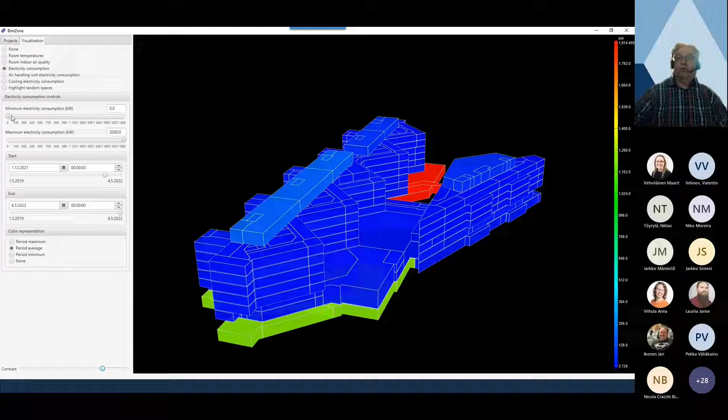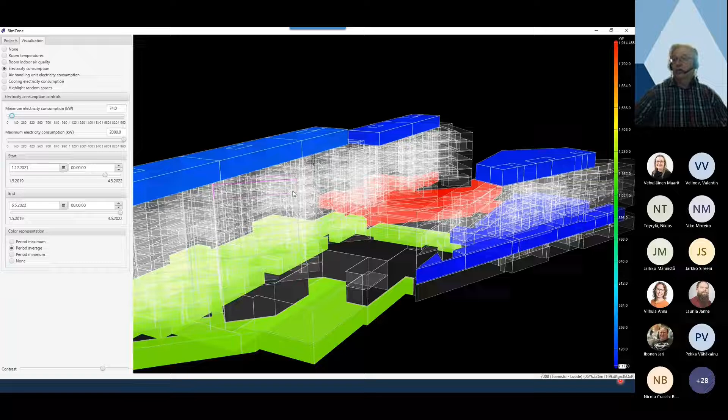And we can select different time scales to see those values. Of course, with this kind of BIM model, as you see when I move the cursor here in this part of the picture, we can see what space is there, and we can connect all that kind of information which is available from the facility management system and similar systems, because we know the BIM related GUID, so we can connect using this kind of information.

And of course it's very flexible. I'm not sure how robust this web interface is, but it's very easy to see, and we can use many different kinds of information here which is available, including analyzed information. But okay, I have so little time left, so I'll continue to the next slides.

Here is the other digital twin - this is the 'behaves the same' part. We use different kinds of approaches to make these digital twins which give the same values as measurements. First was the SARIMA models, and then neural networks - more analytic methods - then feed-forward related neural networks and gated recurrent unit (GRU) related models, and long short-term memory (LSTM) models, which I'm presenting here for electricity.

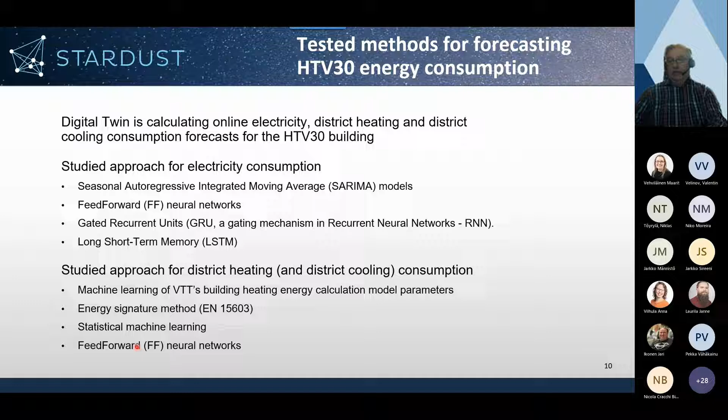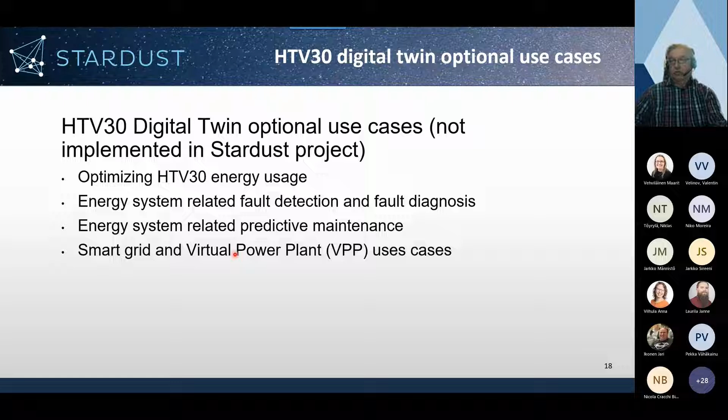Okay, and very shortly, I was also asked to say some words about COVID-related effects on this consumption, because we have all that data. So I will demonstrate that very shortly.